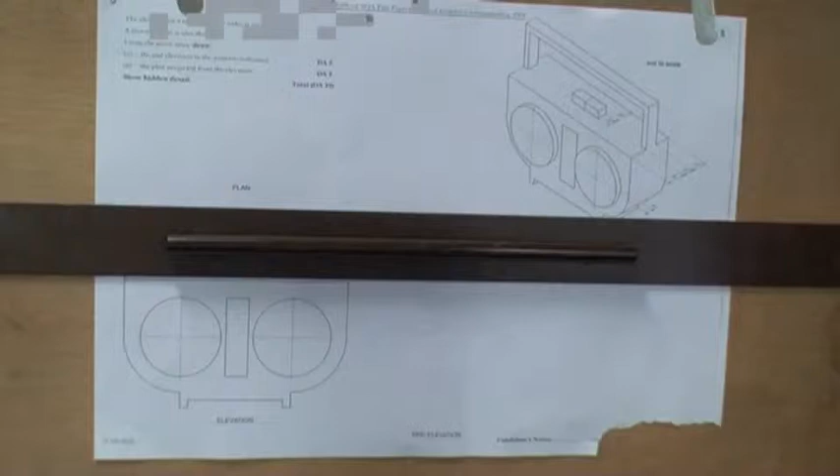Last question on the prelim. You're given a third year exam, with a 3D view with dimensions on it, a full size drawing. Using the sizes given, draw the end elevation in the position indicated.

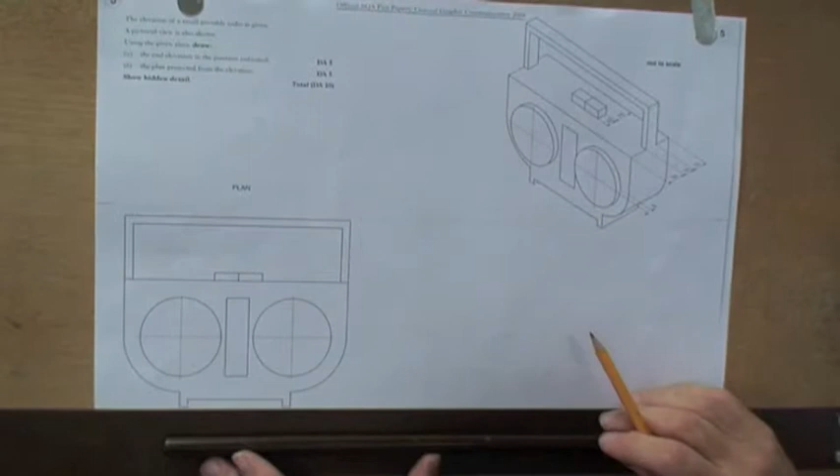To do that, we can project over the overall height, top and bottom. And as for the width, we'll have to do some arithmetic here. So we've got 15 and 15 is 30, but it's 40 millimeters wide. So using a ruler...

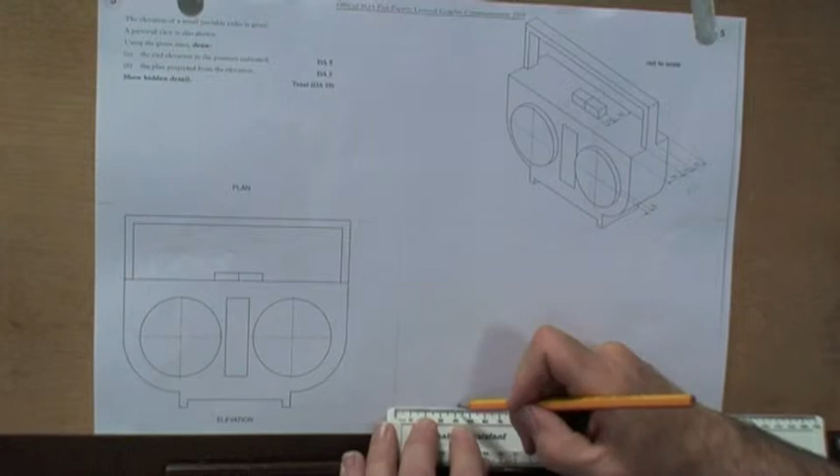And a vertical line to start off with, we can measure 40 millimeters across. And we have the size now of the overall box.

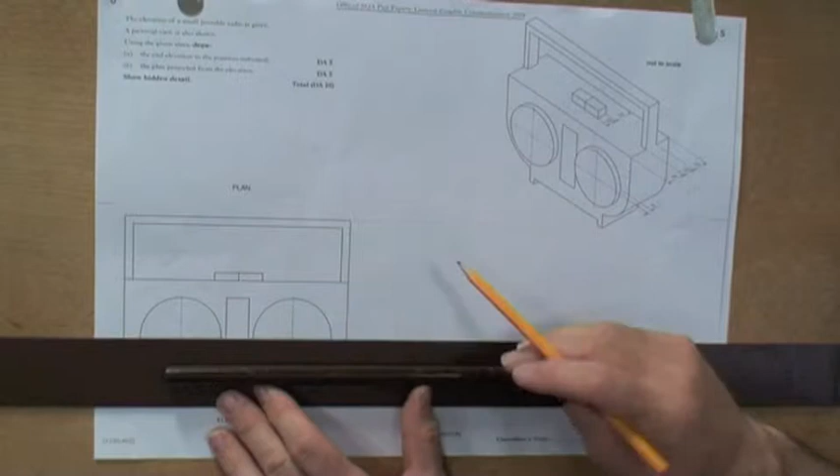Except for two cylinders that stick out 5 millimeters. The cylinders are situated here, so the first thing I'm going to draw on the outside of the box will be the outside, the centre and the bottom.

Then using instruments we're measuring forward 5 millimeters, ruler on, mark on position, and we can draw the outside of that.

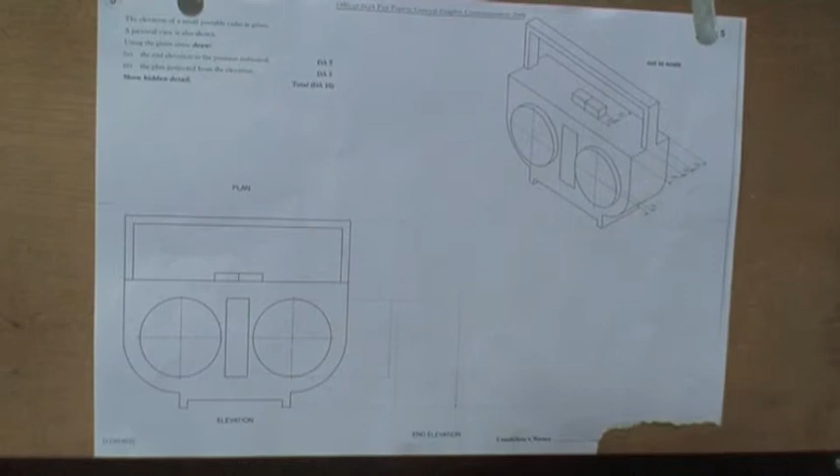Moving on the outside only, there will be a surface down here. There's a surface visible here, and that surface flows to the top. So we have to get some detail. There will be a visible line projected across at the lowest point.

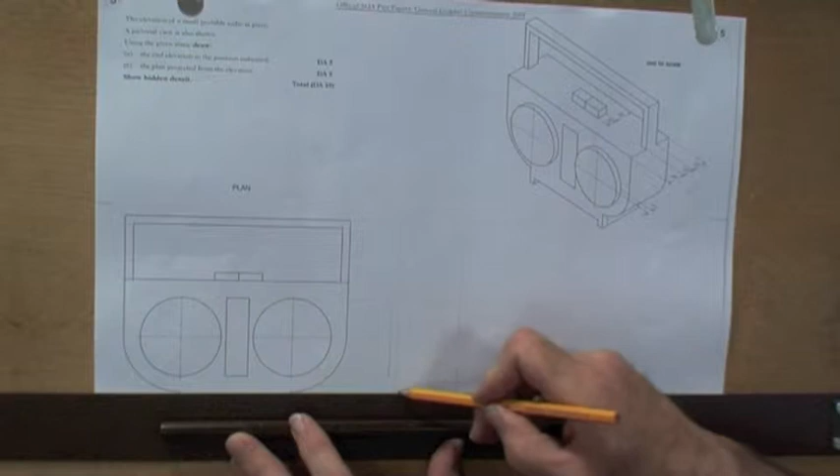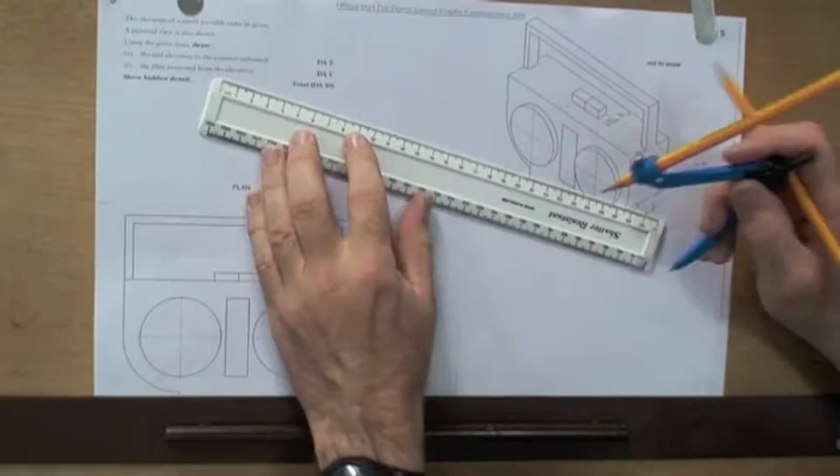There will be a visible line projected across here, but in the middle we have to project across lightly, using a measurement of 15 millimeters on the 0 down to 15.

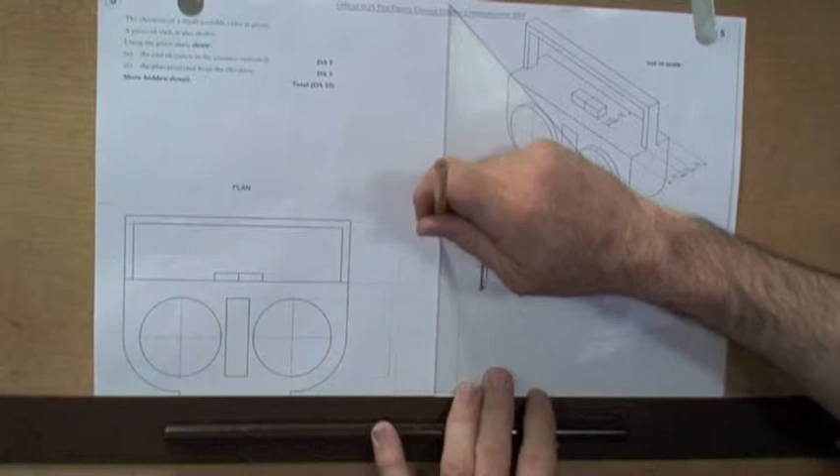We can then measure the same distance in from front and back, both 15 millimeters. Produce a vertical line. Now that's all that's going to be visible on the outside of this. So I could note in an exam: that's seen up here, these two are seen, and there'll be a ridge underneath and a ridge here.

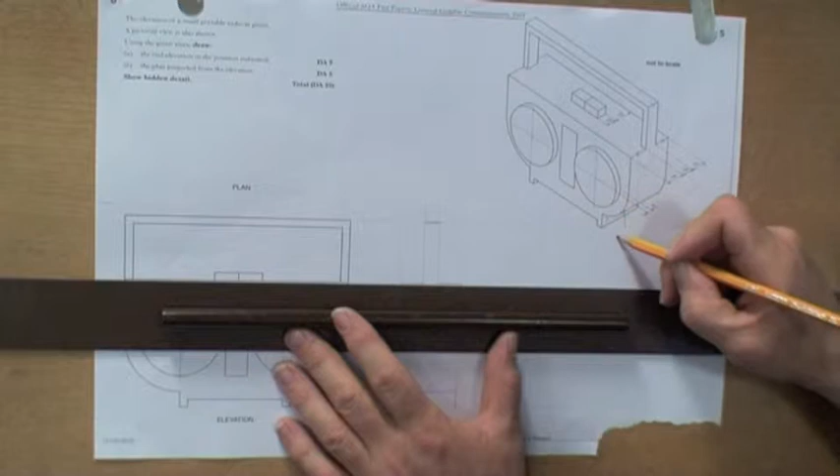Now what have I forgotten? There's also the sticking out cylinder, so I can go back up and add those horizontal lines, and I have to draw the vertical lines in.

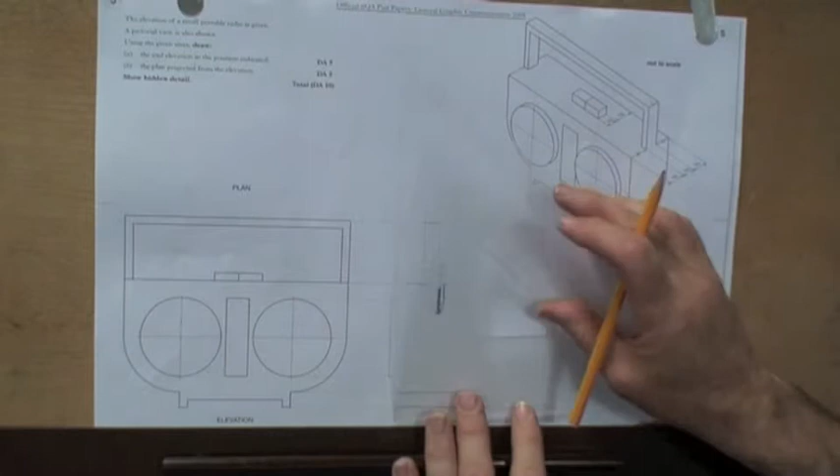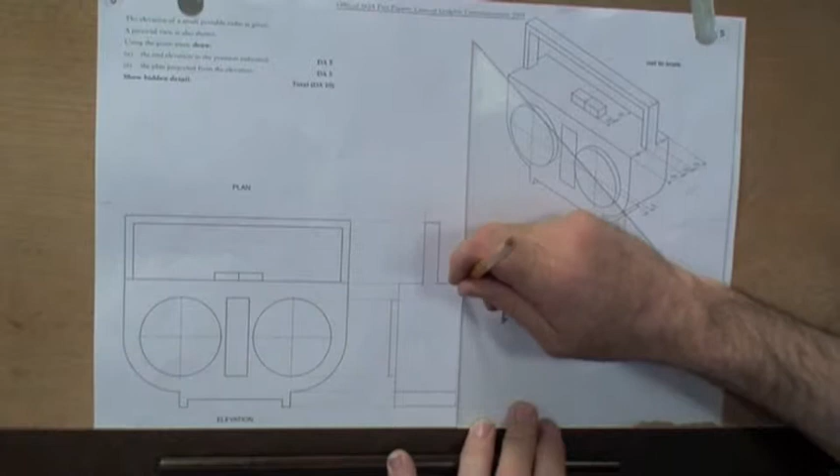We will have the front of the speaker, the front of the unit itself, the handle. Now please note there's a gap here. And the back. Now that's the external part.

There's two things that we're not going to see: hidden detail for this and hidden detail for these. We notice that these are the same width as the handle, 10 millimeters, 10 millimeters.

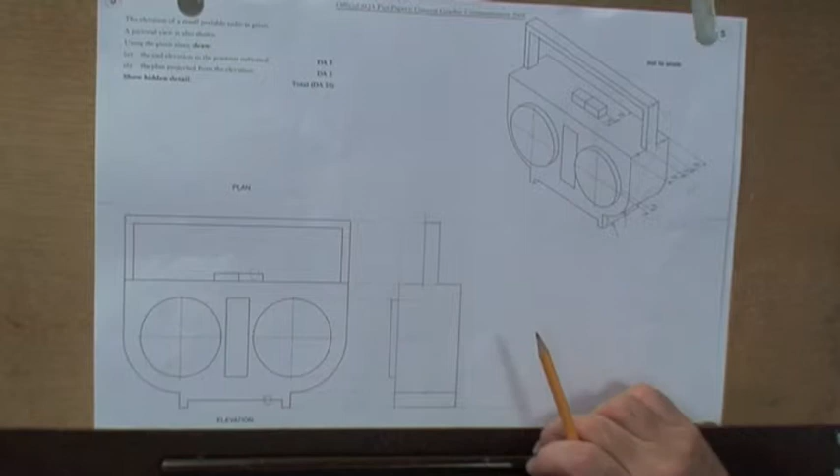There's a flat area in the back here. We will see that as hidden detail. There is the top of the buttons. Again, that will appear as hidden detail.

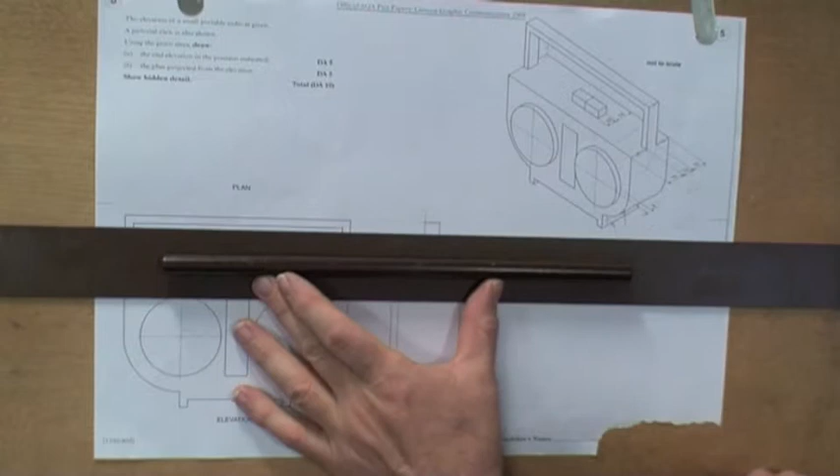And going further up, the underside of the handle is detail we cannot see. Not forgetting this little groove underneath.

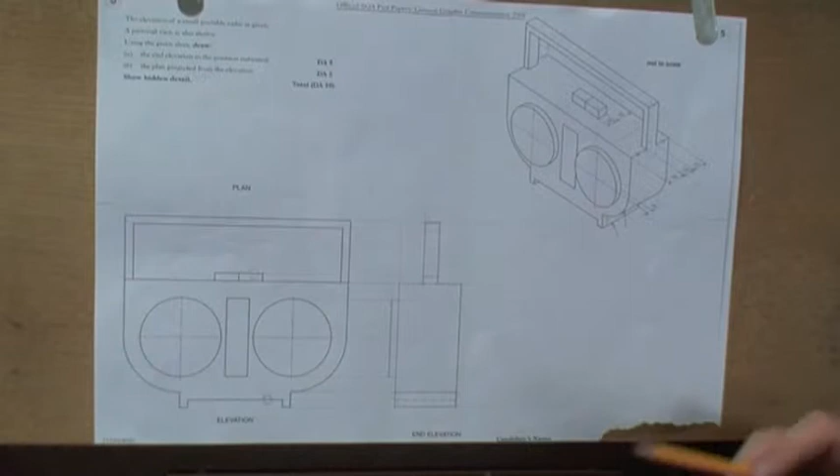Check, we've got the front, the side, the top, we've got the underneath bit here, we've got the shelf here. This is all flat, visible. Put that one underneath. We have a centre line. We should have a small centre line through that cylinder.

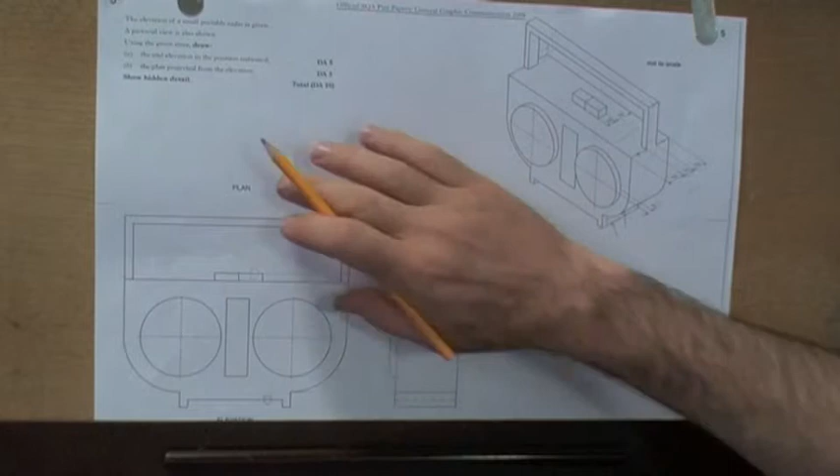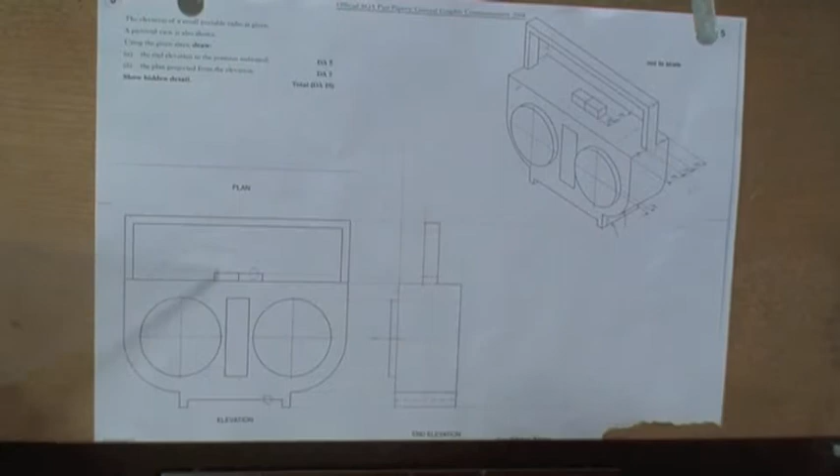Now for the top view. We're given a starting point for it, and I want to try and carry these sizes round. So I'm going to use, in this case again, the front edge here, this surface, and the 45-degree bending line to bring the sizes round.

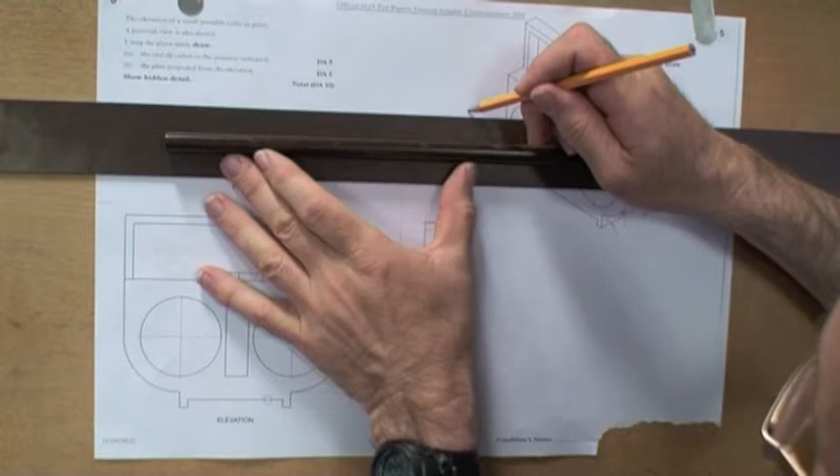The 45-degree bending line will sit there. The overall width, front to back, we can project up and across. The overall width from left to right gives us a chance to get the overall box within which the drawing is going to take place, except for these two.

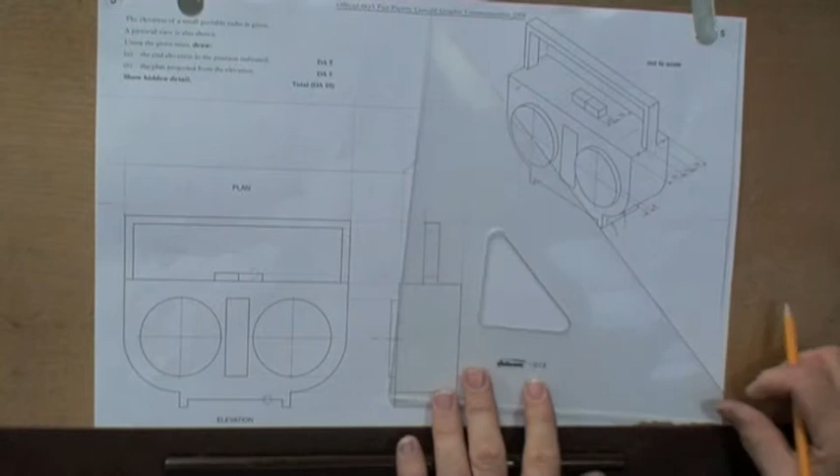We have two cylinders sticking out further, in this case to the front. Aha! My 45-degree line did not go far enough. There we go. So from that 45-degree point here, I can now project across.

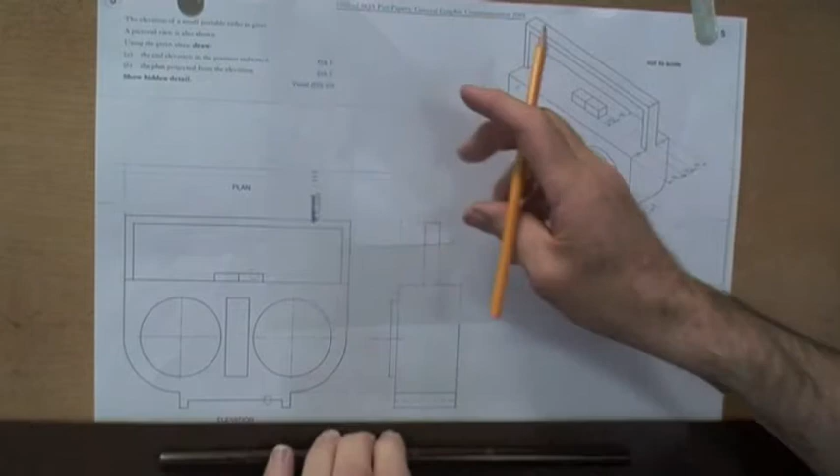And for those two cylinders, I can project up, left hand side, right hand side. And that might be also handy to know for centerline purposes later on where the center is, on the right hand one point, center line.

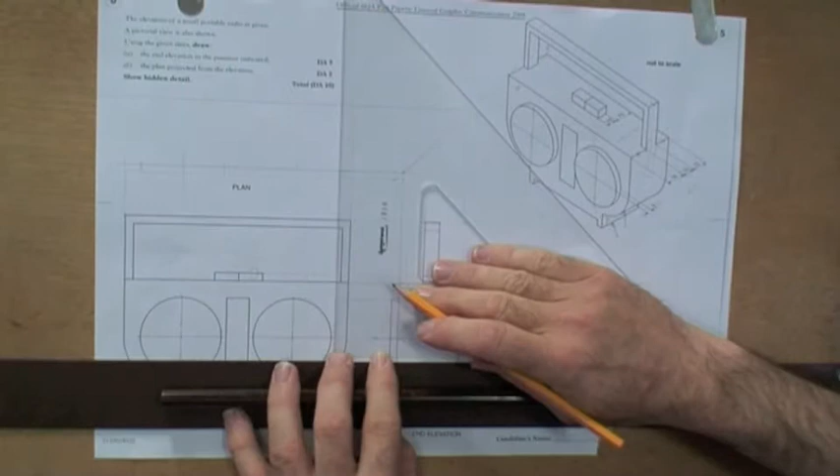Is there anything else going to be visible? Well, yes, on the top of this, definitely the handle. That information we can project across.

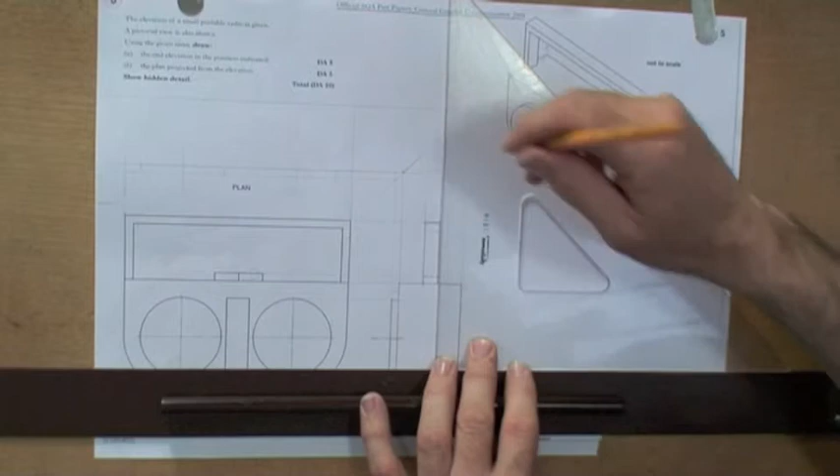So again, projecting up to the 45-degree bending line, up to the 45-degree bending line, and it goes all the way up. We can then project across.

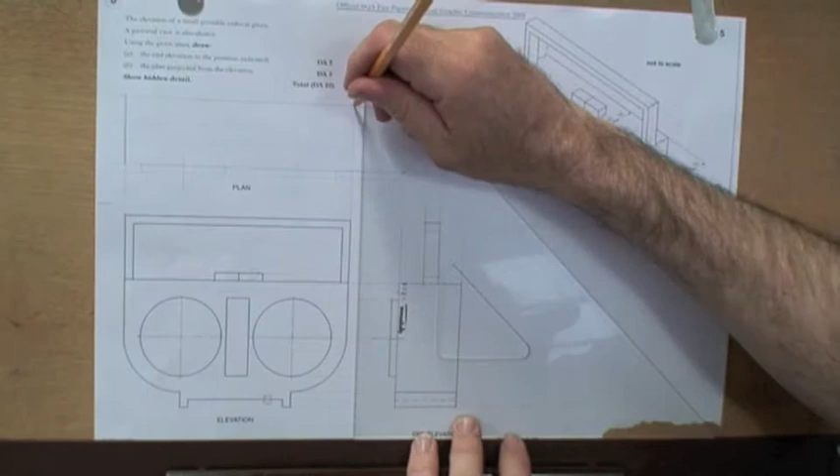So, let me just see. We have the basic box: on the left hand side, on the right hand side, we have a back edge and a front edge. But remember, we have two cylinders.

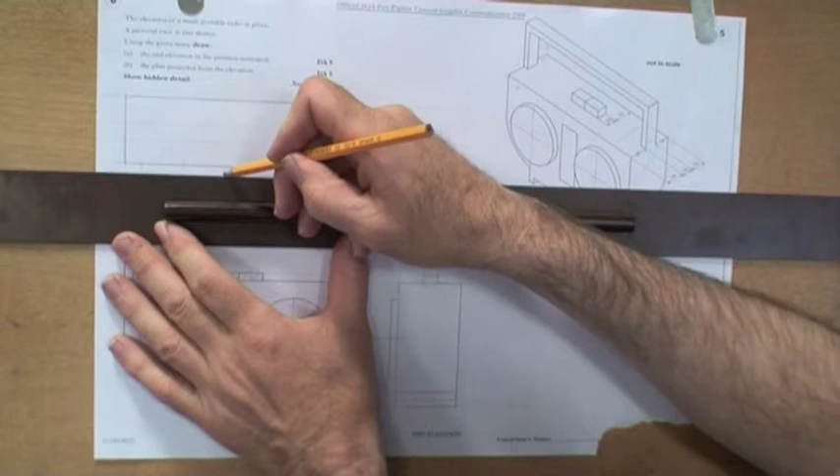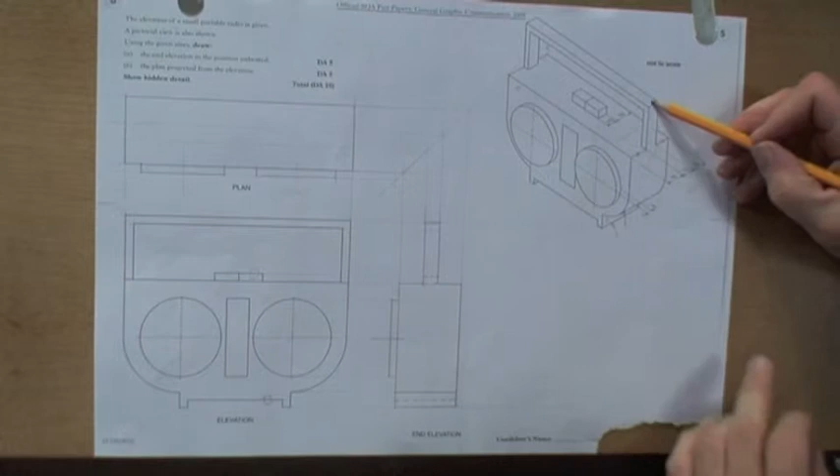Using the given construction lines, the ones we've already drawn, we can now draw on the front. Looking to the top of the object now, the top of the object has the handle. The handle is going to go from side, uninterrupted, all the way across. So we can put in our uninterrupted handle.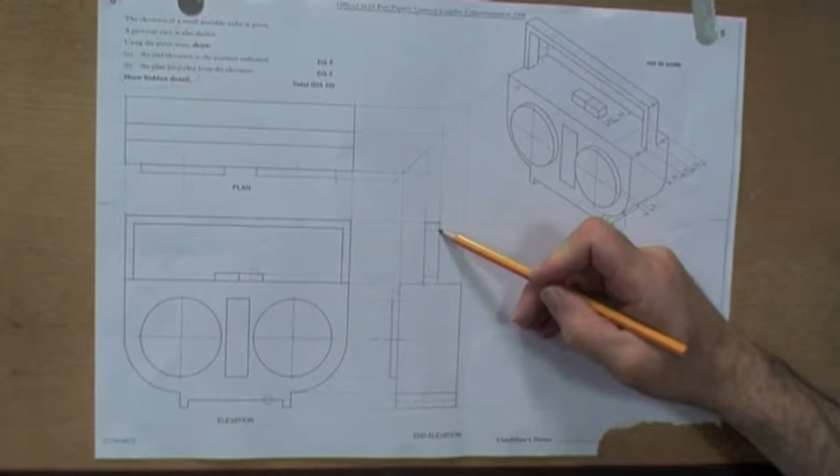Externally, that's finished, but we still have to show hidden detail. So starting from the top, is there a handle detail? Yes. Underneath this corner is shown as hidden detail.

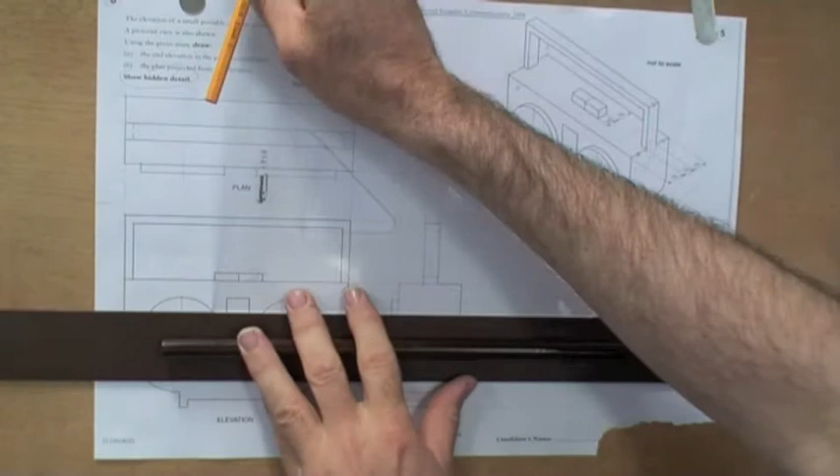Looking down at the next layer, we have buttons. These buttons are hidden directly below the handle, so will appear with the gap in the middle.

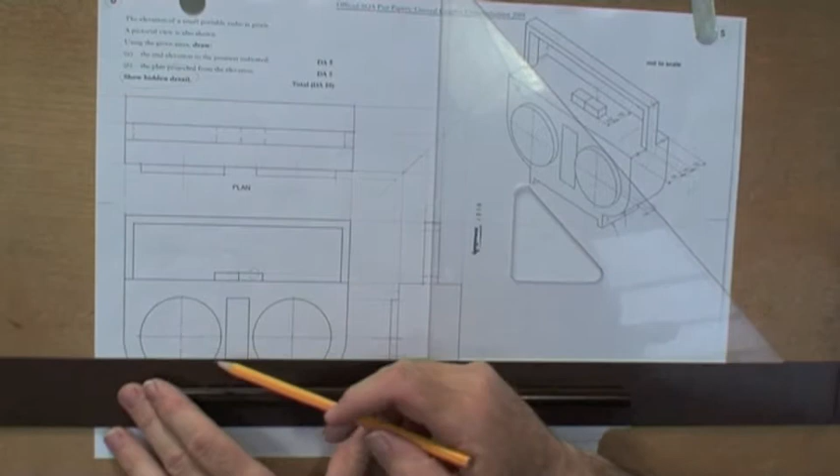Moving down a layer, no hidden detail coming up until we get to the bottom edge. We're not fully at the bottom yet, but this groove goes from front of the body, not the speakers, from front to back.

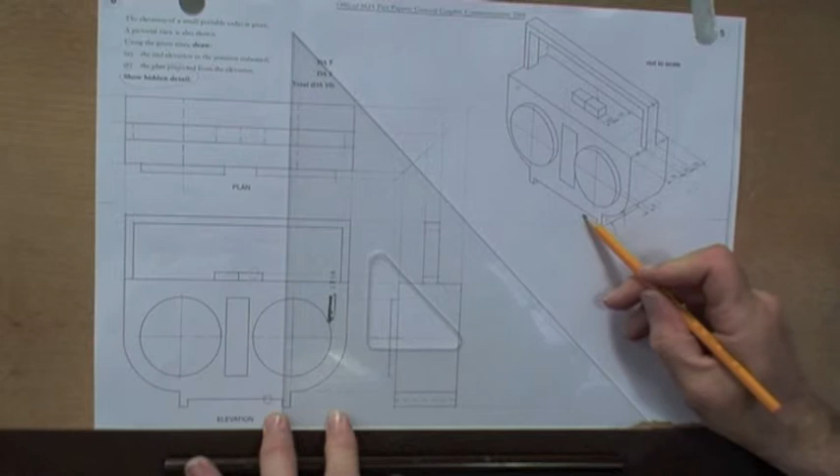Moving down to the lowest level, we also have the little groove that cuts underneath, that goes from front to back.

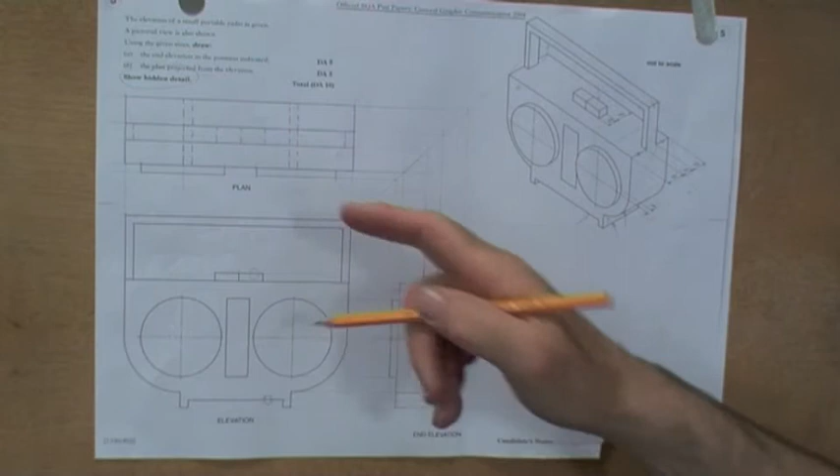Plan, elevation, end elevation, center, center lines. For the cylinder, it lines up with this other point, but we can extend a center line out through the front.